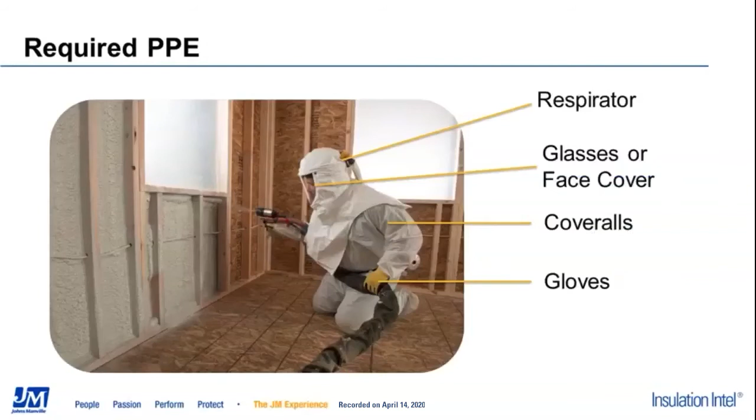So if you'd like, keep a pen and paper. I've got some part numbers, and there'll be phone numbers at the end of the presentation if you guys would like to copy those down. Here we have some common practices for spray foam with the AP Fusion gun. Make sure you guys are wearing all your proper PPE when you're cleaning your gun. That may mean respirators, you definitely want to have your glasses on, coveralls, and gloves. We're working with raw chemicals, and it's very important that we're all safe when we do this.

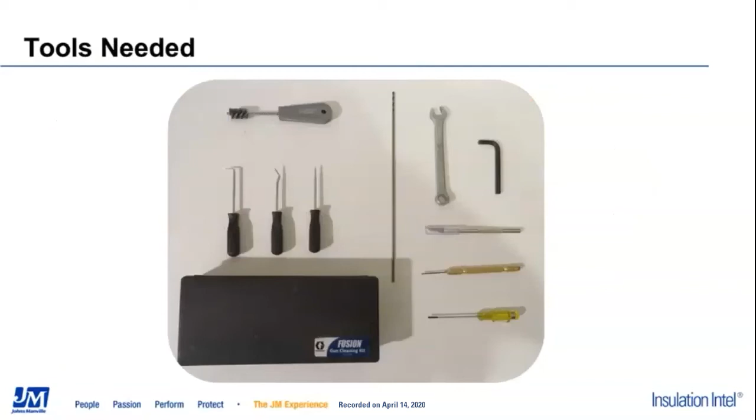All right, we all know that we need specific tools to clean our guns. A couple of my favorites for cleaning my gun are, one, a scalpel, indicated here, just a little razor knife, and a 1/2-inch plumber brush. One of the other good things is Graco's cleaning kits. They also have a drill bit kit, and in the next slide, here's the part numbers for those.

First, the drill bit kit for the handle. If you have a serious crossover, you're going to need some of these drill bits to go ahead and clean your gun, and we'll get into that further in the presentation. Also, Graco's brush kit works really, really good

on the guns. Some things that I don't have listed that I like using is a flush pot. It's a pressure vessel that puts gun cleaner through your gun and evacuates all the raw chemicals.

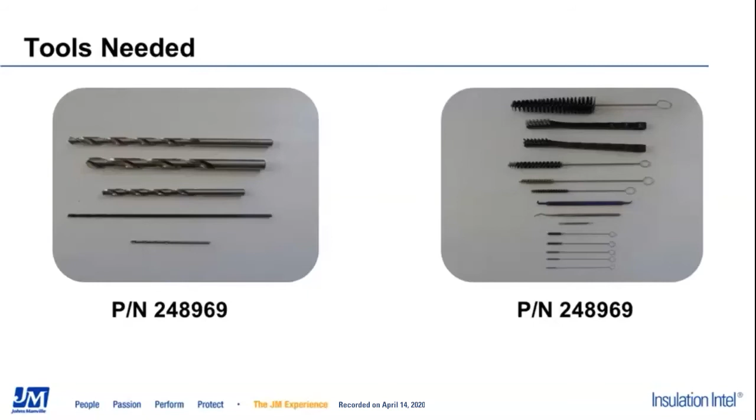Some other tools that you could possibly need. I like using a 9mm nut driver. I use this for when I have stuck side seal cartridges or mixing chambers. I'll get into that later.

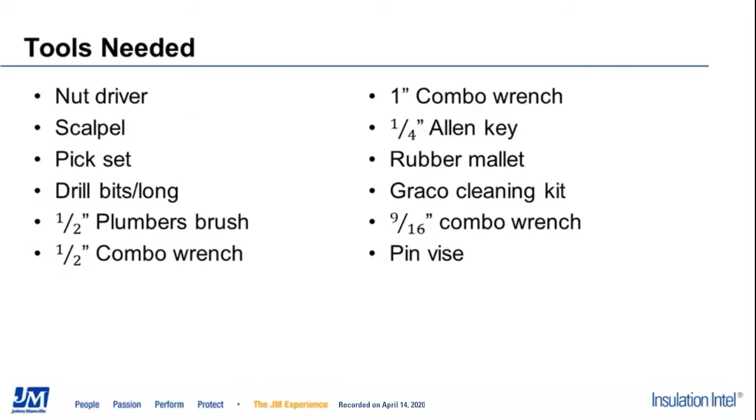A 1-inch combination wrench, and a 1/4-inch Allen key. Also a 9/16 inch combo wrench. These are for the air fittings on the gun if you ever have to replace those. I don't like using channel locks or vice grips as they can damage those fittings, and then you have to replace those.

I know it's kind of strange that I have transfer pumps in a gun presentation, but I thought it was important for everyone to know that with your different systems, you require different pressures. Your transfer pumps, if you're running a 2-to-1 transfer pump, you want to keep those pressures at 65 to 85 PSI max. If you're using a 3-to-1 transfer pump, you want to keep your PSI approximately 50 to 65 PSI. The reason being, those transfer pumps multiply whatever your inbound air pressure is by the 2 or 3. We don't want to overpressure our proportioning pumps.

Your gun air, you can run up to 120 PSI. So you can see the difference, you have a lot more pressure and volume coming through at 120 PSI.

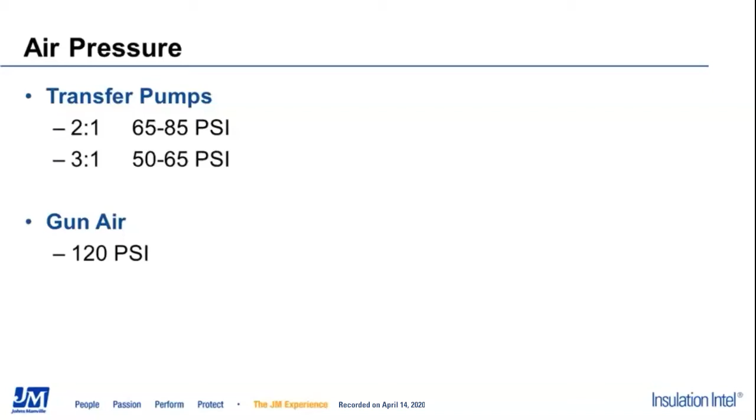This is going to do two things for your gun. One, it's going to actuate faster, and be more responsive when you squeeze the trigger. The other reason is tip air. The tip air cleans the buildup on the end of your mixing chamber, so you're not constantly scraping. It also helps atomize your pattern and keep that nice round pattern.

Okay, our fluid pathways. This is the route that our material takes when it enters the gun. It comes in through our check valve assemblies, goes up through this narrow passage to our side seal cartridge assembly.

In the event that we have a crossover, that's going to be packed with cured foam. Really important that we drill those out. You have one on the A side, and one on the B side. This is so important because if you clean the gun and don't pay attention to this, you put the gun back on your hose, squeeze the trigger, and you're only going to get one side of your material coming out, which makes a mess.

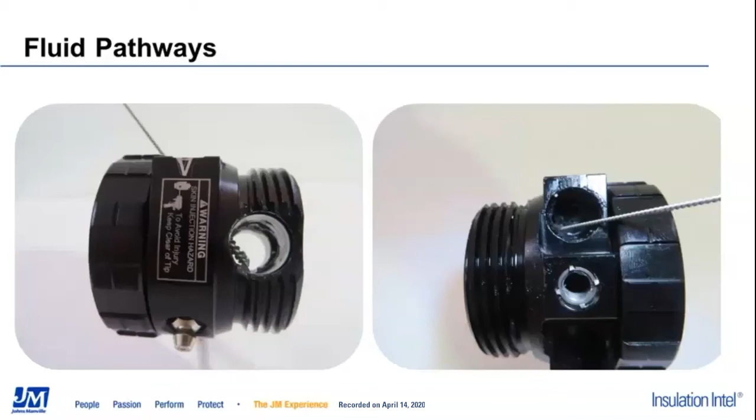So just make sure that you check these if you have a real bad problem with your gun.

Next thing I'd like to discuss is check valves. If you've disassembled your check valve down to all its individual parts, when you reassemble it, it's important that you put your spring guide back in the proper position. If you bottom it out, you can put a lot of tension on that spring, and if we have debris, contamination, or crystallized isocyanate in those spring coils, your check ball might not open up properly. You might not get the proper flow coming through, which is going to lead to a pressure imbalance, and you're going to have a problem.

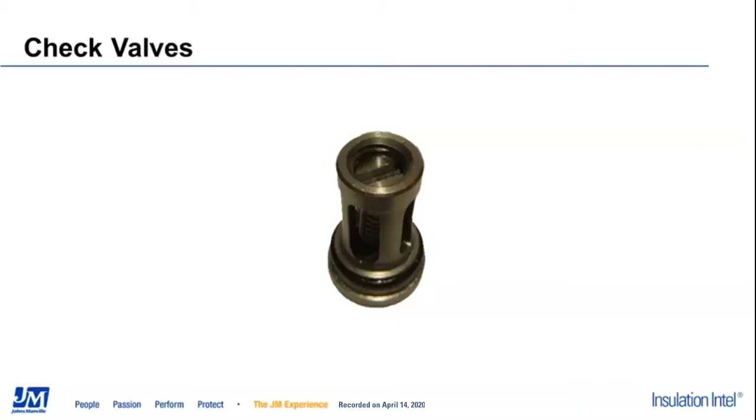Next, obviously, if we get some crystallized iso on those threads, it becomes a real big pain to try to chip all that out so we can get our spring guide out.

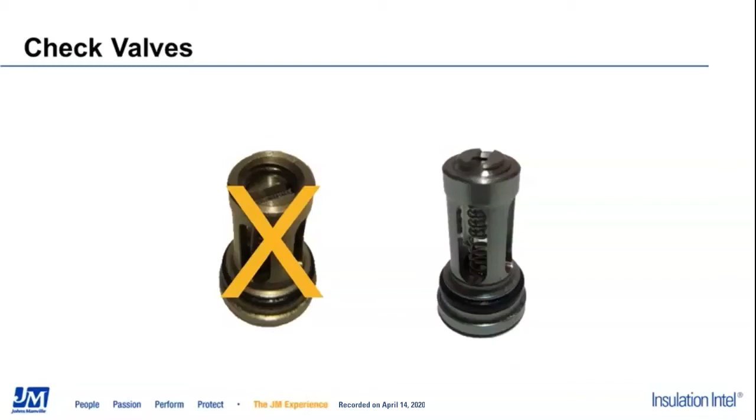So that's a no-no. Next, if you do not recess your spring guide fully or enough, what can happen is when you seat that in its slot, your O-rings might not seal to the fluid housing. And when you put your gun on, you don't have a tight seal, and you can go ahead and get a leak. So we want to make sure that our spring guide is just beyond flush.

This is the proper position for that guide.

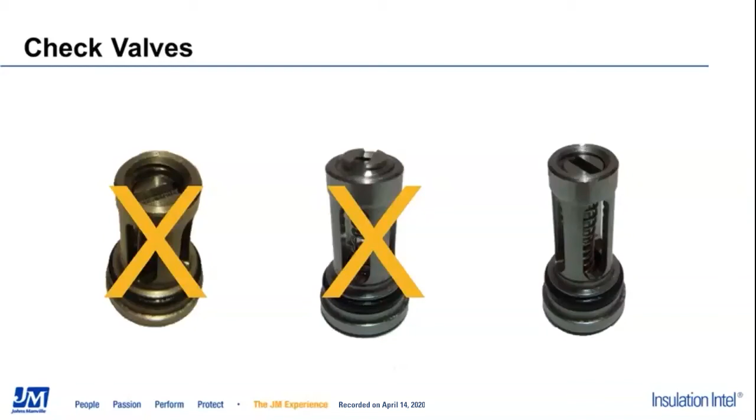So we're going to go with our side seal cartridges, and we've all been there trying to remove a stuck side seal from the cartridge. So we can't get it out. So what's the first thing that we do? You go ahead and grab a pair of pliers, and we start pulling on that.

So we squeeze, and then guess what happens? Our pliers slip off. We repeat, and we get our side seal out.

Now we've gone ahead and rebuilt our gun. We put our side seals back in, and we go to spray, and we open up our fluid valves, and guess what? We've got a leak. Well, why am I getting misty? What happened is when your pliers slid off the side seal, it gouged the corner of it. You can't get a real good seal if that happens.

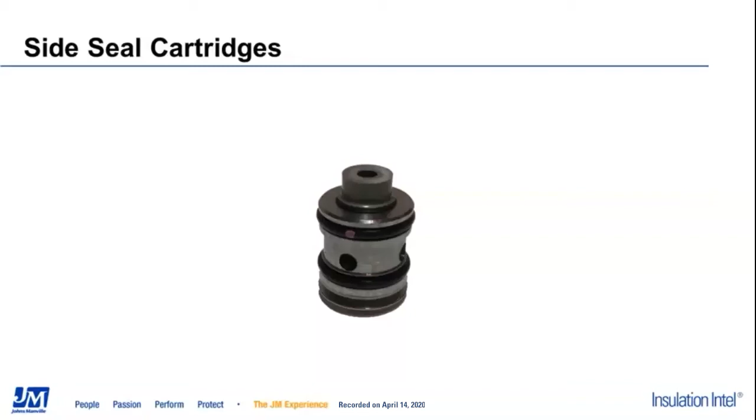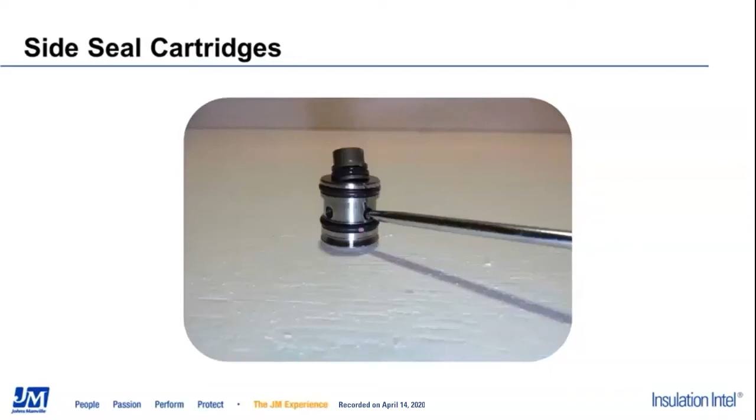So the easiest way that I find to rectify this problem is just to take a pick or a screwdriver. Stick it in one of the orifices in our side seal cartridge and start prying up on it. You may have to use an additional pick or screwdriver, but the side seal is going to pop out. Then we don't damage any of our equipment and we're not replacing side seals before we have to.

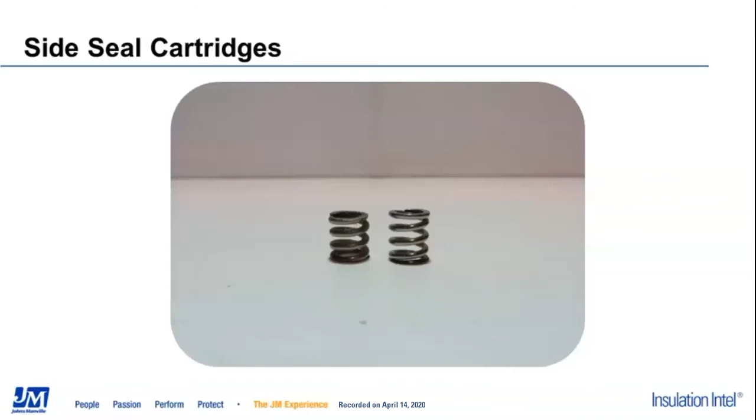So when you clean your gun, you may want to go ahead and check that spring height to make sure that it's still acceptable.

Next thing we're going to talk about here, and this is a common one, is your muffler. You have a mesh screen inside this muffler, and over time you can get debris, grease, and scale off of your compressor coming through your hoses and getting compacted in this filter. If that happens, your gun will not actuate.

If you can't relieve the high side pressure in your motor, it's going to stay in whatever position it is in. So one of the things I like to do whenever I have a problem with a gun and I don't know where it is, is separate my parts. I like to take the fluid housing off of the handle, and then I have 2 separate systems. You can then plug your air into your handle and see if your gun goes back to normal handle operation. If it does, you know the problem is in your fluid housing. If the problem doesn't go away, you automatically know it's in your handle, and that's where you need to start looking.

So in the case of our muffler, what we want to do is just get a wire brush. Maybe use some stick knot, some gun cleaner, or some brake clean, and a wire brush, and scrub this mesh filter out as best you can to get you through the day. Then just know that you need to order another part, and it needs to be replaced because that one is having problems.

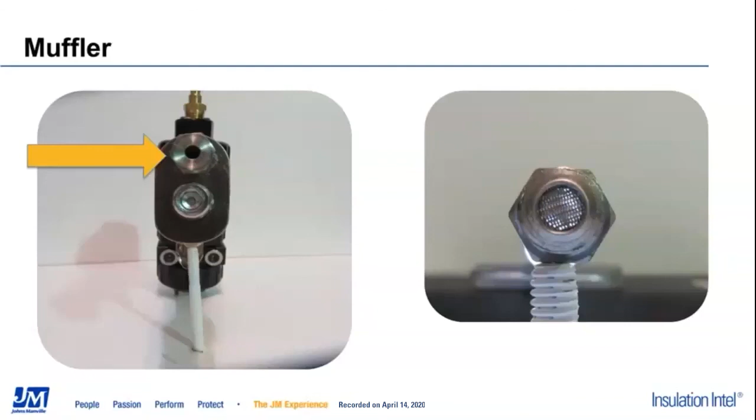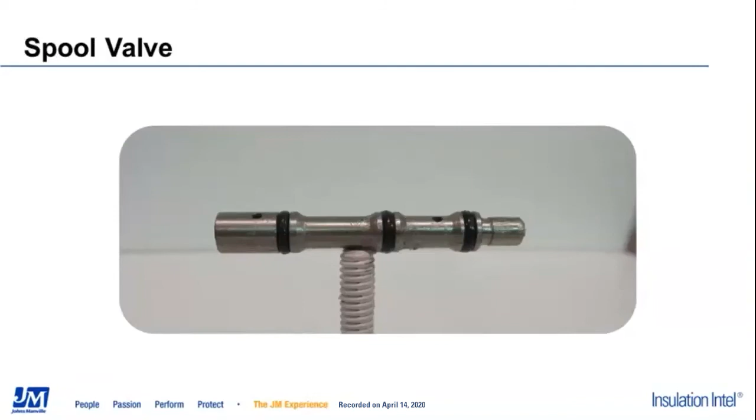All right, next on the agenda is our spool valve. This valve is what dictates which way our air goes. It goes to the front of our motor or the back of our motor, and that's either spray or not spray. This piece is hollow through the center, and it can get compacted with debris just like our muffler.

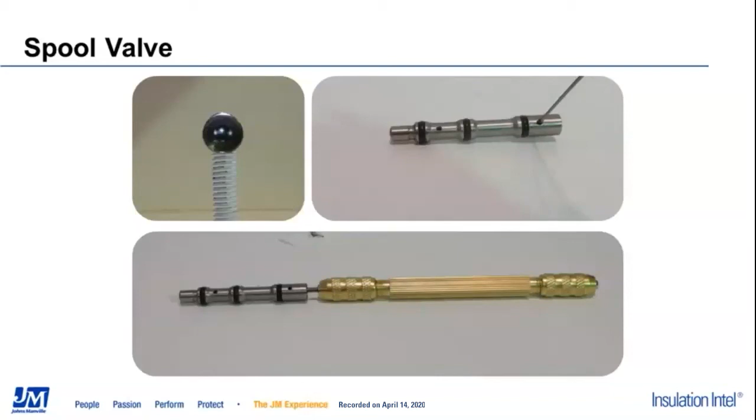If you're having problems with your handle, this is one of the things you want to check. It's very simple: get your pin vise, use your mixing chamber drill bit, and drill up through the back of it. Also make sure your cross air passages are open—you can drill those out if need be—and then check with some air to make sure you've got flow going through the whole spool valve.

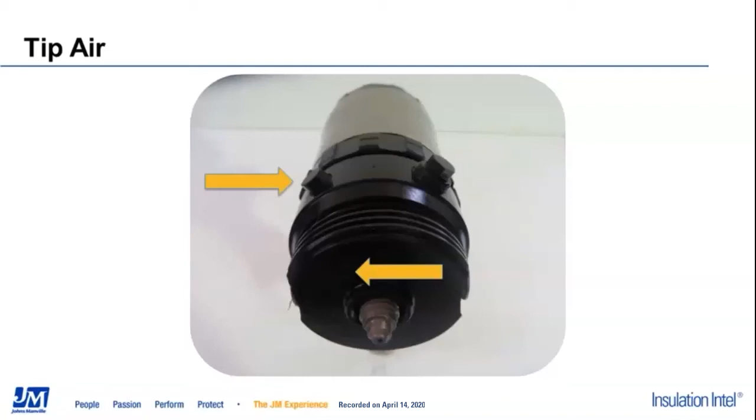Next, we're going to talk about our needle valve. If you're holding your gun, as this arrow indicates, this is your needle valve. Probably 95% of the people I go visit don't even know what this is for. This needle valve controls your tip air, which comes out the front face of your fluid housing. If you have a crossover, this is one of the areas that's probably going to get clogged up with cured foam. It's simple: take out your mixing chamber, take out your needle valve, and drill both orifices out. If you can see your drill bit coming through, as shown here and here, you know that pathway is clean. You can also blow that out with air when you're finished.

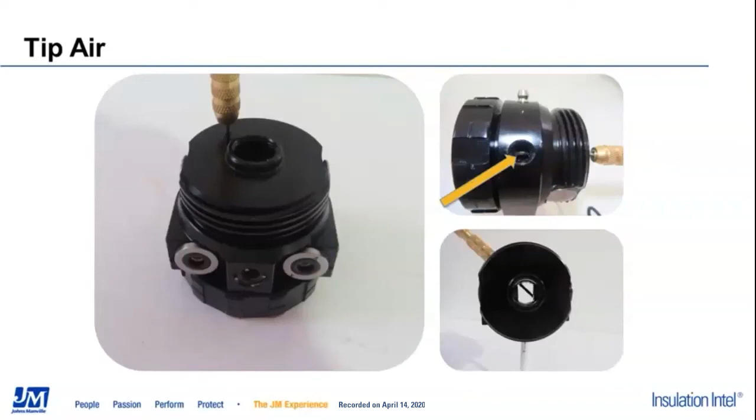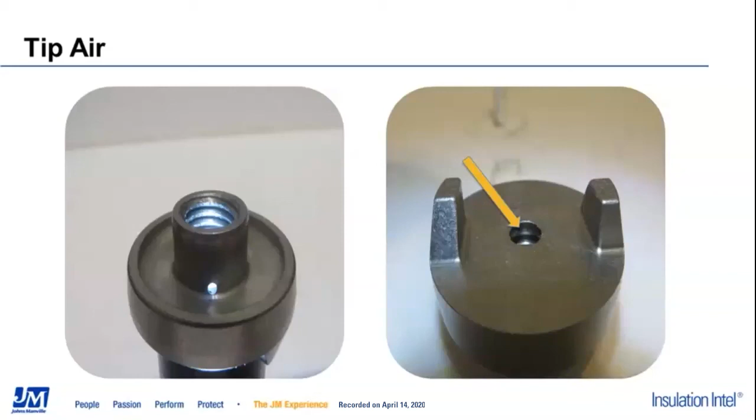So this is our air cap. You all know about it, but some people don't know what all the little pathways are for. You have 4 pathways: north, south, east, and west. They lead up to the center where the yellow arrow is pointed in the right-hand picture. There is a recessed ridge in there, and what this does is diffuse the air from those 4 individual points and put it into a circular shape. This air helps keep your mixing chamber tip clean, and it also helps atomize your pattern, keeping a good spray pattern. Now when that ridge becomes compacted with foam, or any one of our 4 air pathways in the air cap stem becomes clogged, it puts more pressure on the other ones and can affect your pattern. You might get a couple fingers, or it might all push to one side—this can be a cause of a bad pattern, just from not cleaning your air cap.

Now we're going to talk about the front air passage in your handle. I get a lot of phone calls saying, hey, I can't drill down from the top air pathway in the neck of my handle. That's because it's milled at two individual angles, as you guys can see here. In the neck of the gun, it's only going to go down so far, and then it's going to change angles to go down. This area here is where your spool valve lives—that's where that goes.

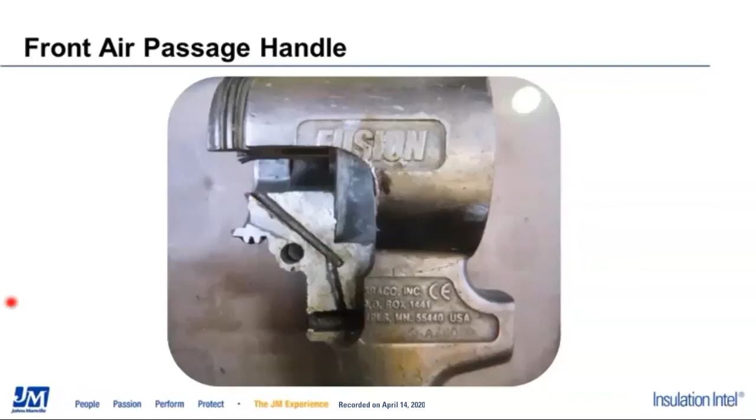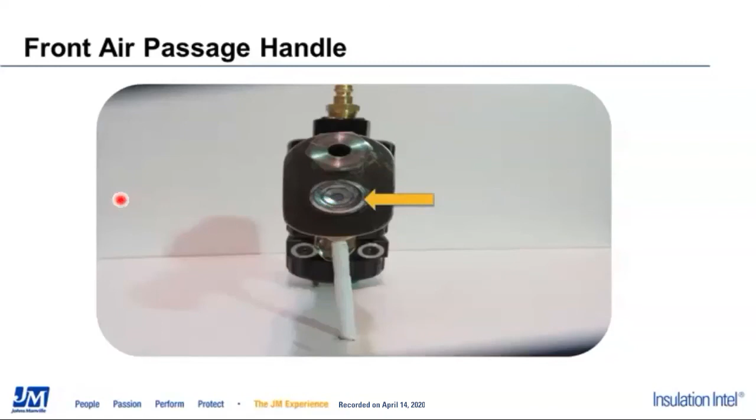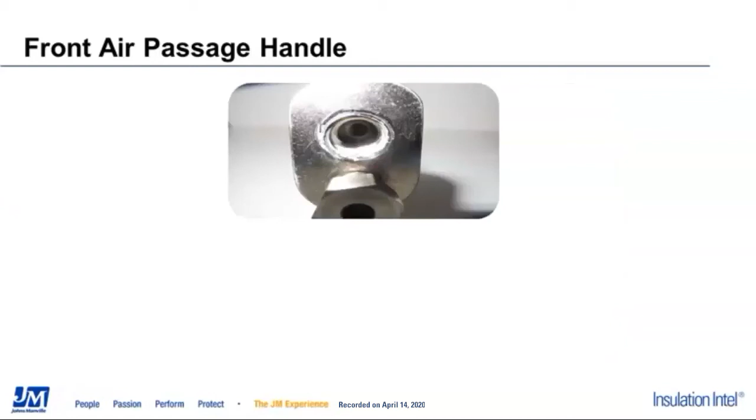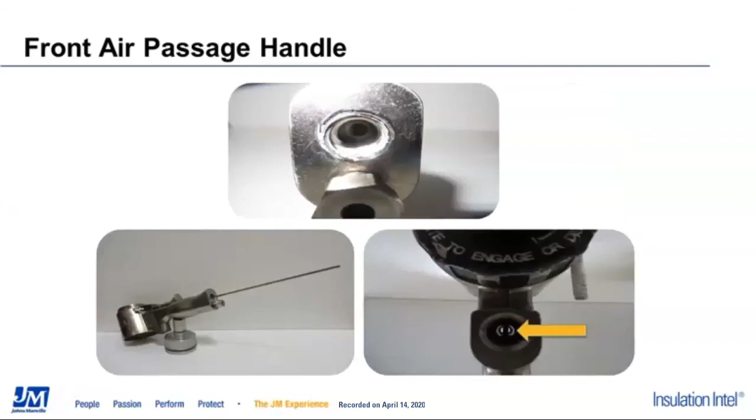So to get to the bottom pathway, you'll need a quarter-inch Allen key, and it's the plug just in front of your muffler on the bottom of your gun. This is what it looks like coming up through the bottom. If we want to clean the bottom angle of our front air pathway, it's very simple—we just get one of the drill bits out of the drill bit cleaning kit and come up through the bottom of the handle. So if you look here, you can actually see the drill bit. Now this is where our spool valve goes, right where my laser pointer is at. So this is right straight through the spool valve area, and you can see the drill bit—that's as far as it's going to go. It cannot go up because of the angle change.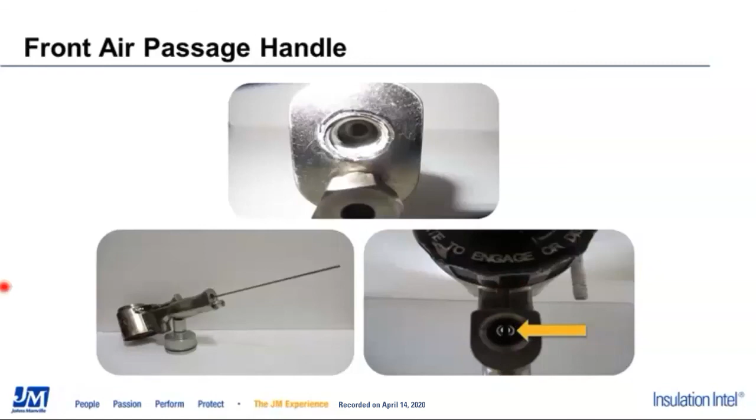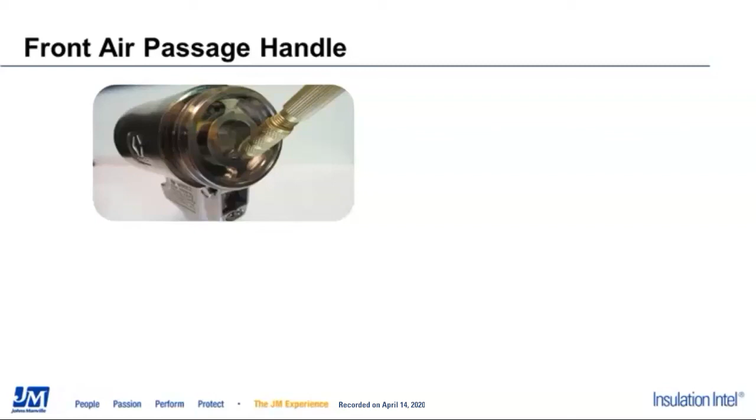So what we need to do is get our pin vise with our little drill bit, and we're going to come down from the top. It's only going to drill down so far. You don't want to put a power drill on this and try to ream that out—trying to get it clean, you'll ruin your air handle. So as you can see, it's not coming through.

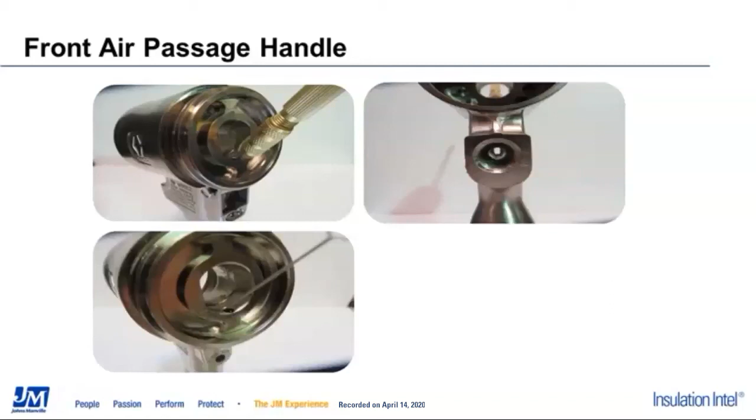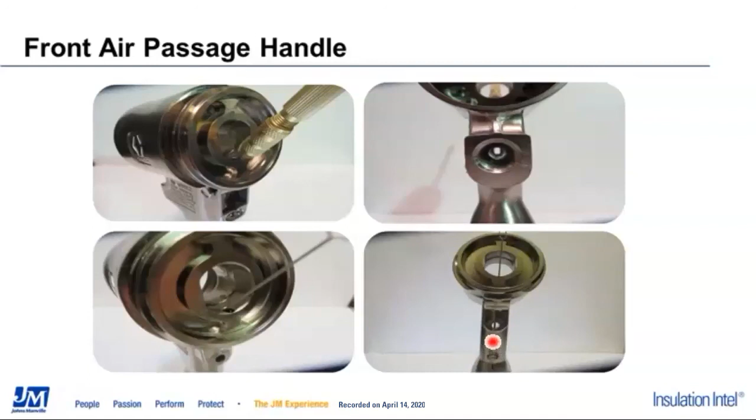Now what you can possibly do, if you have a thin piece of wire or the brush set from the Graco Cleaning Kit, is simple: put a slight downward bend on your wire or brush, and you can get it to contour to the angle change so it will push through that whole area. I know this isn't a great picture and it's kind of hard to see, but if you look closely, you can see that brush has gone all the way down into our spool valve area. Nice and simple—we know it's clear there. If you want, you can go ahead and put some air on that, blow it out, and then we're happy.

All right, we've got some additional tips for you guys. We've all been there: we've got a stuck mixing chamber, we've got stuck side seal cartridges. All right, well, how are we going to get these out?

For me, it's kind of simple. You just need a couple things. I like using a 9mm nut driver. It fits down nice and easy around our side seal. It's not going to damage anything.

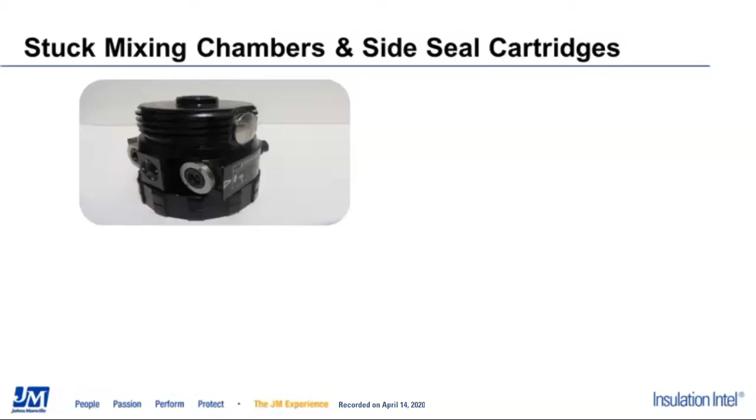And then it's just very simple. You can just go ahead and get a rubber mallet or nylon hammer, and just gently tap down until that side seal cartridge pops loose.

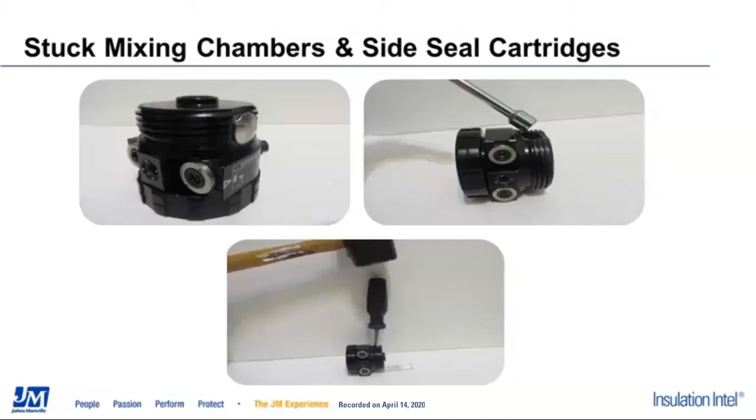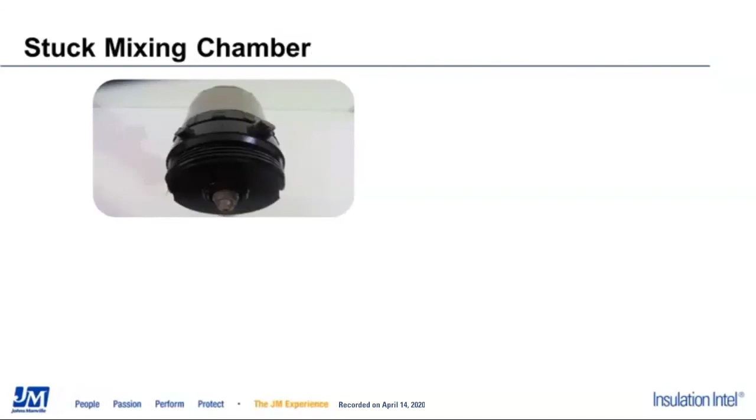It's going to be really the same thing for your stuck mixing chamber. You've had a crossover, it's basically glued in place. Maybe you soaked it in some cleaner and it hasn't worked. So again, what I'm going to do is get my 9mm nut driver out, put that over the end of my mixing chamber, and I'm just going to gently tap down on the front of that mixing chamber until it starts moving.

Now just remember, we're not playing whack-a-mole here. It's just nice, easy taps to get that mixing chamber or that side seal to start moving, so we can get it out without damaging the cartridge, the mixing chamber, or the fluid housing. This is all about not wrecking our equipment.

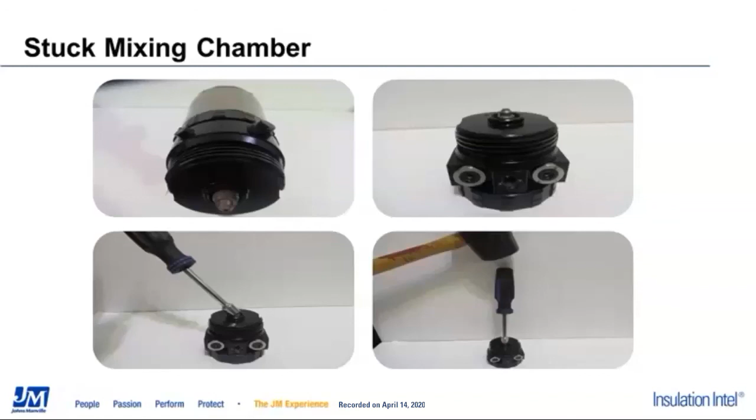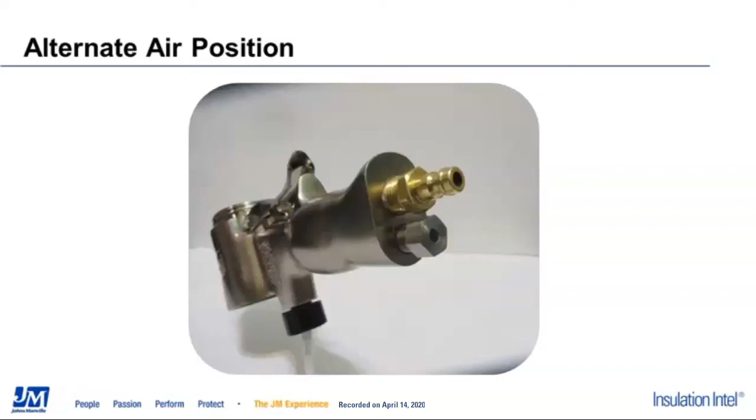This is an alternate position for your air. Not a lot of people know about this. Some people do like their airline coming in the bottom of their gun. I'm one of them, but yeah, this works good for those of you who may want to try it.